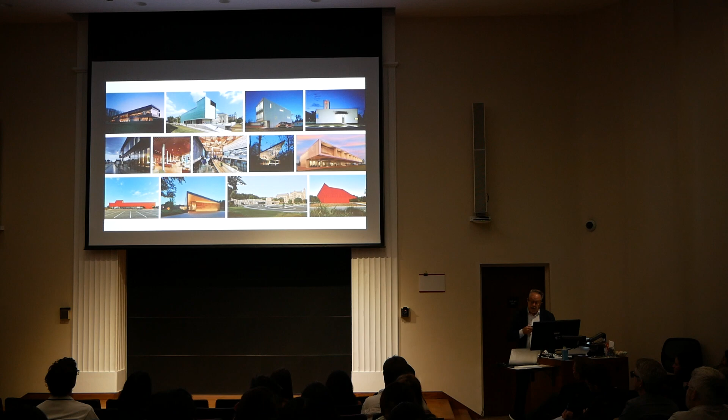So we're a firm of 25 based in Fayetteville, Arkansas, as was said. For the last 30 years, we've been working on a variety of types and scales of buildings, everything from carports to schools, churches, healthcare, and all types of buildings, all types of scales and budgets - even now international work with the State Department, where we have a new American embassy from the ground up in the poorest country in the world, the Central African Republic, which will hopefully start construction next year.

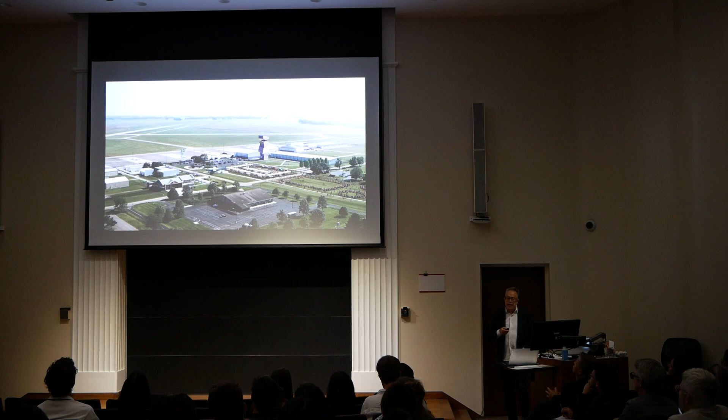Just a range of projects, but really coming at it with a very similar ethos. What we like to think about is that wherever we work, place is the canvas, architecture is the medium, and it's shaped by the forces of nature and public life, and is particular to local form. We like to say we make work in the place, of the place, for the place, and sometimes necessarily out of the place in order to make that work.

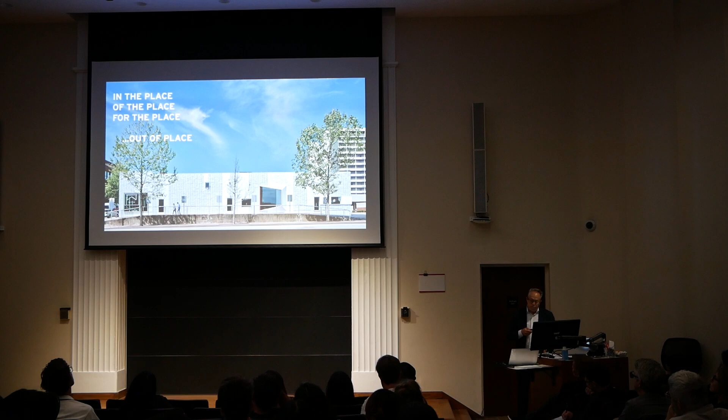I know it's kind of crazy, even 5 years ago, but we took every window opening that was there. We decided to do an essay on windows we love, always thinking about elements and spatial propositions as a way to develop a character without having to develop a very novel narrative.

But nonetheless, we always think of this as the existential moment when you walk into the office. You have to be prepared to take on the bear, these challenges that are much greater than you, but you have to take it on with a great sense of purpose.

For us, place is really defined as a tangible representation of that intangible society that lives within, and I like to call this placeness. Thinking about placeness, and wanting to make an architecture of places, it's really necessary for us to embrace everything about a place, even the bad things, even the tortured histories of places, and to get below the surface to the underbelly and incorporate them in who we are and how we design, and what an architecture of the place, in the place, for the place can be.

So often this is a story of transformation, taking the world as it's given to us and representing it on our terms. We're always inspired in many ways by the patterns that connect, the patterns between what's nature-made and what's culture, as a source of inspiration in the work, looking and operating at high culture and low, and the in-between.

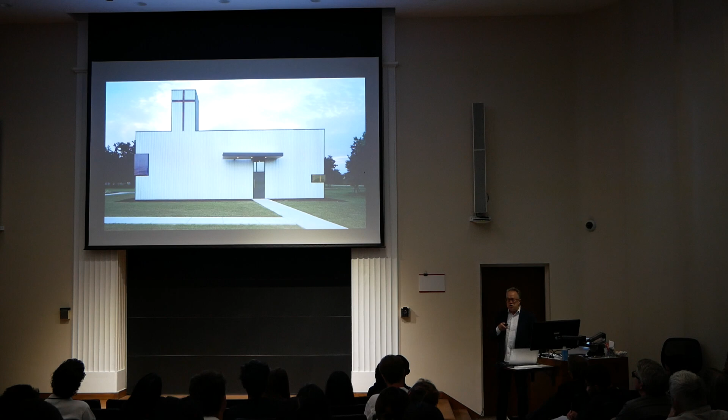What we do is customize all the transition details so that we get a great deal of seamlessness, let's say, in detail. And how would we do this? Well, we took the existing shed, left it as is, wrapped it in a new skin, a new substructure. We added 10 feet to the front of it to create a narthex, by which you can move north-south to get on the east-west axis into the sanctuary for about 100 people.

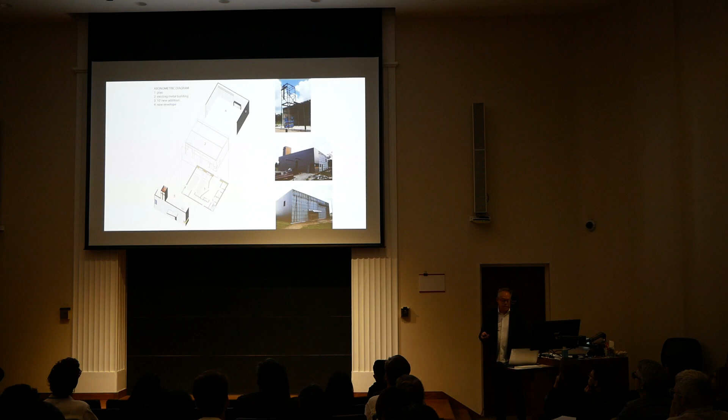The walls open up to allow for an oversight and a fellowship hall. They're very simple. I call it the true American double skin envelope. And here it is here. And so those transition details really allow for things to seamlessly shift around.

And then with a fidelity to craft, what we try to do with every project, no matter how modest, is think about the presence of the worker and the hand and how that can be elevated in some ways. So we coursed every element to the ribs that we had, in a very carefully precise dimension. Everything is neatly fitted in with the windows, the canopies, and at the door you see the concrete pad, that's actually the fire doors, neatly as part of the site. So all of that to get to the level of abstraction we wanted.

But they really wanted a dome, and we had told them before we could not put a dome on the church because of the pre-engineered structure. So they allowed us to put it in the plenum, but they couldn't afford the dome that we had spec'd for them - they just didn't have the money. And our contractor was saying, I don't know if I can build one that would be acceptable to your level of craft. So what do we do?

He goes, well, I have friends. And so he came back a few days later and said, I got this friend of mine, he's a retired metal worker, lives out in the mountains about 40 miles away, and he loves beer. For two cases of beer, he'll make us a satellite dish this year. So we were in the middle of construction, so we trucked it out, skin coated it in plaster, jacked it up on a scissor lift, and we have our dome. So that's how we rolled it up.

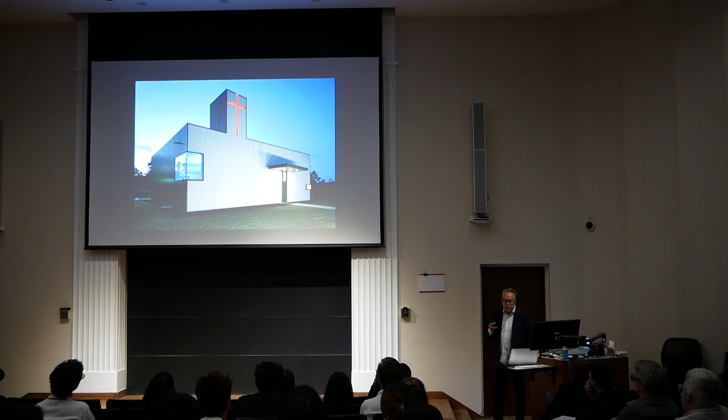In 2013, we were notified by the AIA Institute Honor Awards that this little project had won an Institute Honor Award. They said they were so impressed with the budget that they did research into the history of the awards program and discovered this is the least expensive building to ever win one. We were thrilled, because it underscored what Ati and I and our whole talented team have been trying to do for the last 30 years: demonstrate that architecture can happen anywhere, at any scale, at any budget, for anyone. It's not reserved for the few, it should be accessible by everyone, and that's the approach we take.

So in that spirit, this idea of transformation of a building, we can also think about transformation of a landscape. We had that opportunity at Shelby Farms Park in Memphis, Tennessee. This is a 4,500-acre urban park, the largest in the country, and we worked on it with Field Operations, James Corner and his team.

They were already working on it for a few years. We were brought in to look at the heart of the park and how to generate a new identity for it, with greater access for all the constituents of Memphis. It did not reflect the socioeconomic and racial diversity of Memphis, and we wanted to get it profitable, in the black, because it was constantly just barely surviving.

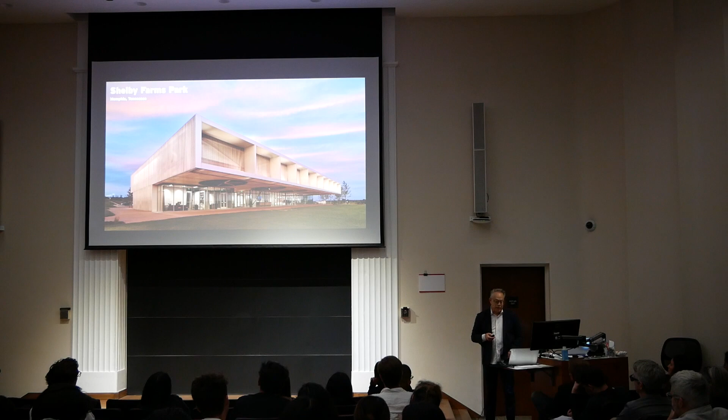Part of the park is this 200-acre area where they expanded a lake, and we were asked to generate 7 or 8 new programs, new structures, an ensemble of figures that would activate the park and the spaces between them. I think Corner's team planted over 1 million trees in the park itself. Really exciting collaboration.

The other side of Memphis in this park area was a prison farm, where prisoners actually farmed the land. They had blue ribbon cattle, and that's basically how they fed themselves, or whatever was left over was sold back to the county. In the 70s, when this was no longer considered an acceptable form of rehabilitation, it was turned back over to the county, and it was well beyond their capacity to manage. Developers wanted to group together to turn it into suburban housing development, but the citizens stood up and said no, this is a great natural habitat, we want a park. So they formed a 501(c), and that's how Shelby Farms came about.

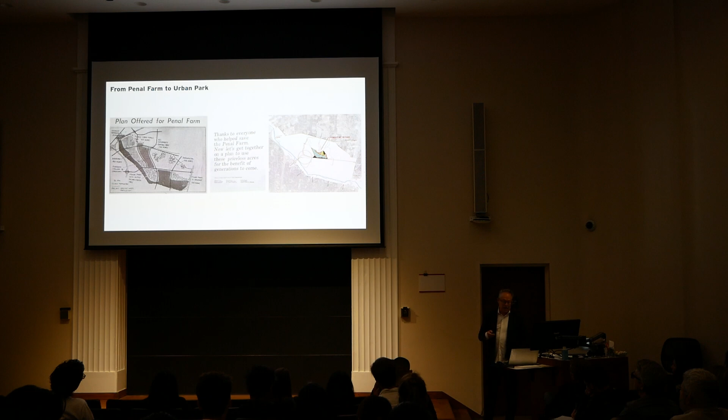You begin to see that we worked along the edge, while JCFO also developed more programmed activities along the lake. One thing we noticed when out on the site is that wherever there was shade, there was people. No shade, no people. Pretty common sense.

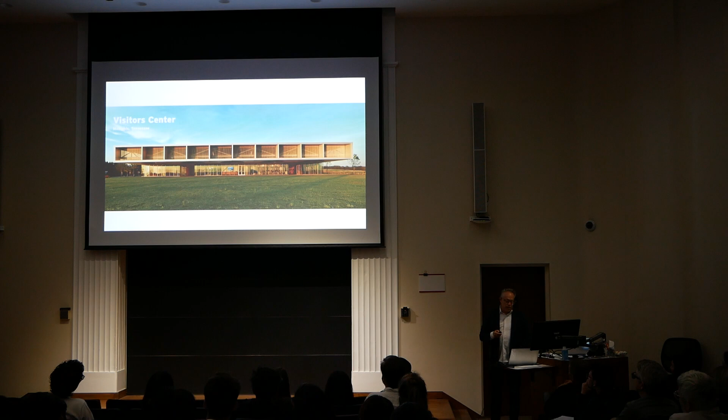But we realized we were in the middle of old pastures for these projects, and that the landscape was going to take a while to come in. So every building had to create its own shade. We thought about going back to roots, back to origins, the vernacular ways breezes were created through dog trots, breezeways, porches—this is well before air conditioning. So our first building is an 8,000 square foot visitor center with an 8,000 square foot porch, oriented toward the south, made out of a very simple palette of materials.

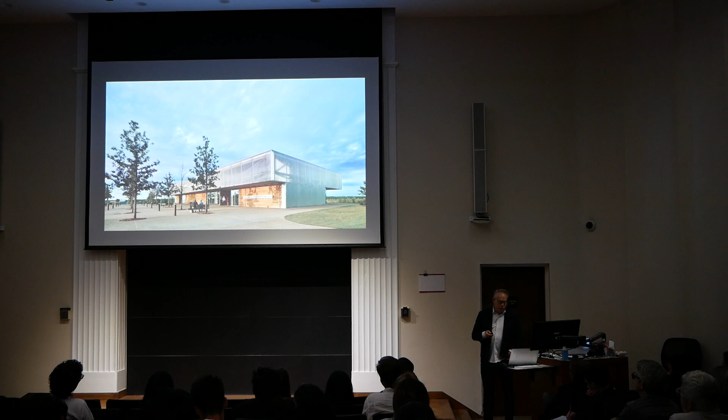We took local bar grate, aluminum bar grate, and turned that into a cladding system to create a diaphanous skin with local third growth cypress planks, and metal panels where we could use them. These extended breezeways that cut through provide a cooling effect, but they also set up these beautiful extended thresholds into the landscape, these uninterrupted views.

The shade from the 32-foot cantilever basically shades this part of the building year-round, so they can program it to create other revenue streams like yoga, receptions, other things going on out there. And to cool it—if you're in Memphis and you're in the shade, that doesn't mean you're cool, it just means you're out of the sun—you have to ventilate. So we did that with Big Ass Fans that keep air moving through.

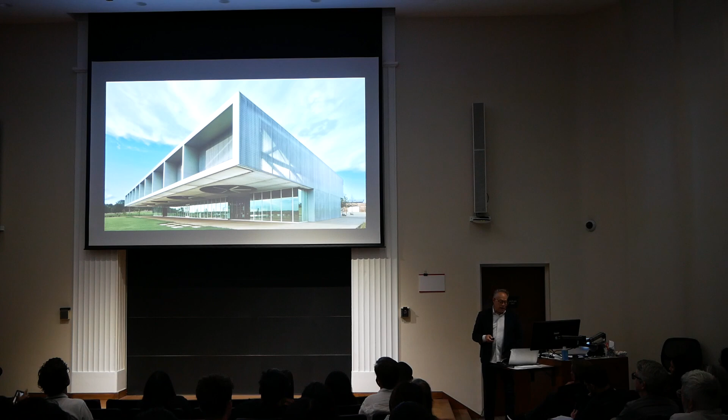Here you can see the diaphanous skin, the way light moves through it. It really changes color throughout the day because it's taking the temperature of light, capturing that and representing it to us. Beautiful configuration of the land by Corner really fixes every building to the site.

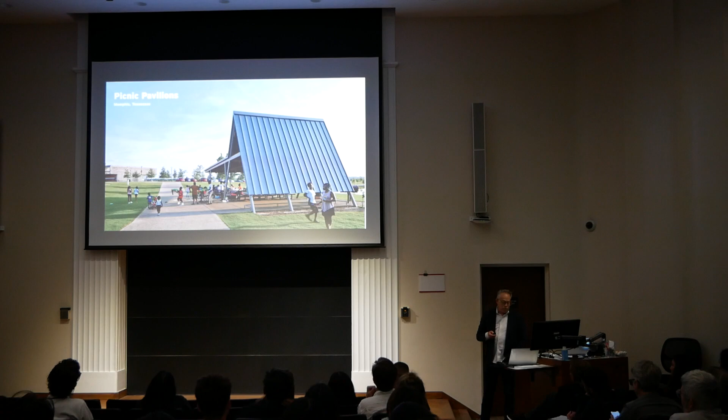We have a collection of these buildings, the picnic pavilions we like to call the crickets. These are booked out for months. They're great shade pavilions, but they're also great places for family reunions, and it's really become quite popular with the citizens this year.

And then the boathouse with its canoes, paddle boards, kayaks and so forth, its own porch there and some concession stand. Again, using the same palette of materials, as reductive as we can make it—we try never to use more than two, maximum three materials for any project.

The stage pavilion serves the event lawn, and on the other side are events that happen on the lake, so it kind of does both. And when it's not being used, it makes a really great shade pavilion and gathering spot in the park.

And then finally, the restaurant event center—a 500-seat conference area, along with a large restaurant with a very large porch. We initially worked with Kimbal Musk, Elon Musk's brother, who you never hear of, but he has this farm-to-table restaurant called The Kitchen out of Boulder, Colorado. This was their first standalone restaurant here.

It really has a beautiful interface with the lake, with this extensive porch, 80 feet deep. Most of the people sit outside and have these great sunset views of the lake beyond.

And what's happened since it opened in '16—one, attendance has more than doubled. The racial diversity and socioeconomic diversity has increased by over 7%. And it's been profitable ever since it opened too. So it demonstrates how we can strengthen institutions, and these transformations can happen at scale.

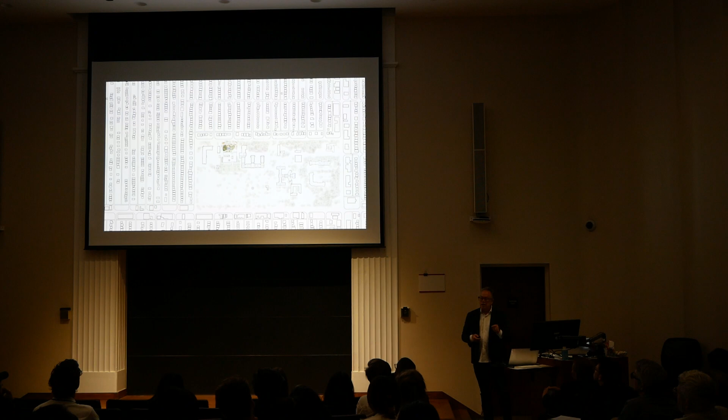This is the context it sits in the campus. You see all the single-family homes here. It's a very kind of vital place. There's lots of emptiness as well, but the way to bring this back is through education. One thing about Detroit, if you know anything about it, all the hipsters are moving there, and they're all moving out as soon as they start having kids because of the education system. So we've got to figure out how to fix this. This is the first step in that direction.

So we were asked to not do the community engagement. It really had to be done by folks who had the trust of the community, who've been there a long time. So that was Dan Pitera, lead of Detroit Mercy, who has a group that has a lot of trust with the community. So they did that.

And of course, they kept coming back with the aspirations. The community wanted a new identity, a community center, a sense really of ownership of this particular piece. And one of the things they sort of insisted on was that they did not want a monochromatic building. They wanted polychrome, which Wendy Jackson, the managing director of Kresge, also seconded. And so she and I got into a conversation about this, like, well, how do we do that? It's terrifying for an architect to take polychrome from the inside and put it on the outside.

Well, in our talking, we started talking about the Great Migration, we started talking about Southern culture, and we came on this common experience that we had both been to Gee's Bend, the quilt ladies at Gee's Bend in Alabama, which we're originally from. And so I'd been there several times, and so we began to think of this as a coat of many colors, a kind of quilt, the same way in which these ladies take discarded rags and cloth and stitch it together into these beautiful, useful works of art. We thought, maybe we could kind of stitch this all back together.

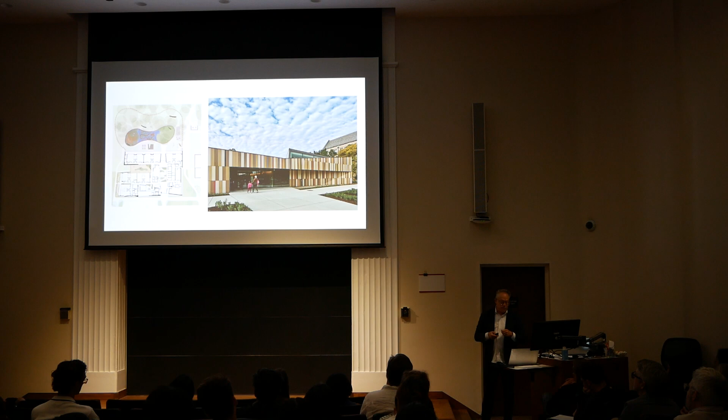And then we looked at ways to grab light from the side, from above, from the front, help articulate, again, this idea that elements—doors, windows, columns, and such—can be spatial propositions. And so just a very gentle kind of welcoming of that wall that sort of inclines or inflects into the building here and welcomes people in, families. And of course, the front of the first courtyard here, the lobby on the left is a coffee shop for families, and on the right, community spaces that can be used even after hours.

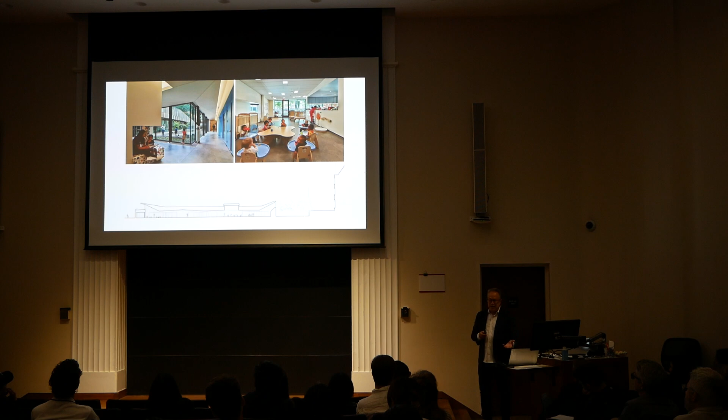And then again, these are controlled places for play, but great places for light. Every space in this building is a learning or educational space. The circulation space is never truly circulation—it's always used for learning in some form. All the classrooms are oriented adjacent to the outside or to a courtyard. And we're using a kind of sectional device we call pitch and roll that begins to create the plenum for mechanical up above, but creates a sectional difference in every room in the space itself. Again, to move beyond some false notions of democratic space, which everybody gets the same thing, into ideas around choice and similarity and variety. And just finding ways, like carving away in the hallway, to make this nice reading nook.

Every classroom has direct access to the outside. If you're having a lesson, you can go out and make an analogy to something outside. It's really great, that kind of thing.

And then there are different types of places where they can take their lunch, have a lesson, play—very multi-purpose. And in the community spaces, all lit from above, there's lots of activity that can happen.

As a way to bring families together and to strengthen the community organizations, the courtyards spill out into this grove of trees to the south. This is a landscape done by Margie Ruddick, who did an excellent job weaving together an education and learning playscape that's really quite active. And in the evening, everything lights up and acts as a type of lantern or beacon.

One of the nice things—I'll go back real quickly to this—is this is also the access for families in the neighborhood who want to walk to drop off their children. So it has this sort of double front, but it makes it part of the neighborhood that surrounds the campus.

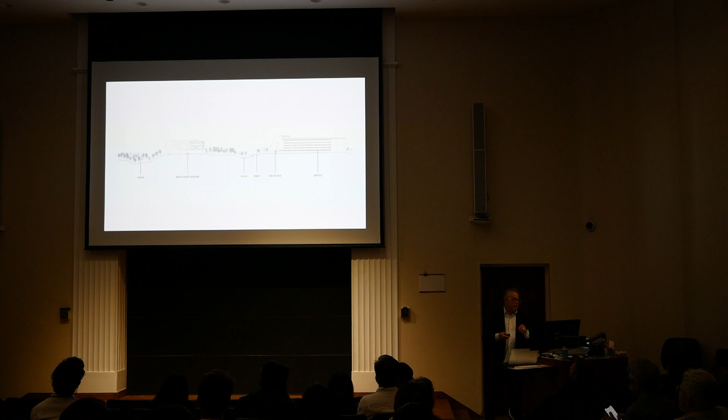The section here shows these ravines and valleys where these things interface—just to kind of understand formally what we're trying to do.

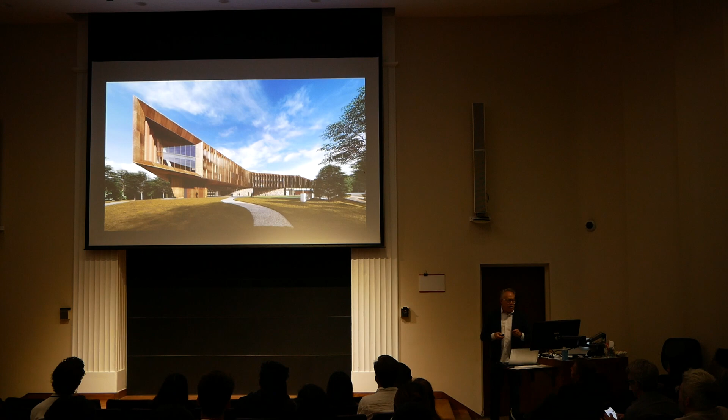We're always looking for shade for porches—sometimes they're designed, but they're also provided. How these are programmed shows there are big plans already with a community porch up at the top as well.

You can see how it brings that bent lawn under construction here. This should be done—the contractors keep at it.

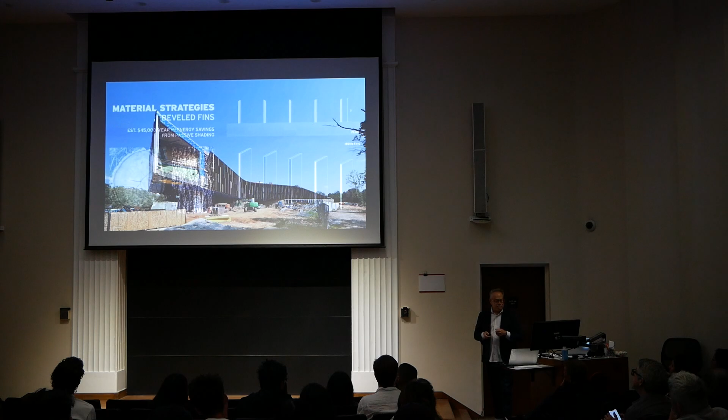The material strategies are very simple. Like I was saying, we're beveling the fins. We're really looking at striated bark on local white oak as a way of thinking about how bark around a tree captures sun and shadow over the course of the day, making that happen the same way. Full-scale, one-to-one mock-ups really test the ideas and make sure we get the details right before we start.

This is a museum-level quality building, so we're considering this our first one. You can see it now going up, around the sun's lighting and such.

Just a sense of how those portals and shade porch areas work—it really becomes a threshold. We're playing with ideas of counter space, shadow, and light.

We're always making light a feature here, even in the stone. We're using what we call rope joints—joints that sit around, strong enough to hold the stone in place, and they create great shadow play as well.

Everything has to flow, so we have a lot of rounded edges and so forth.

The interior has the same idea of the forest and the cave, with the stone floors. This is all local milled pecan to develop this beautiful canopy that happens on every floor.

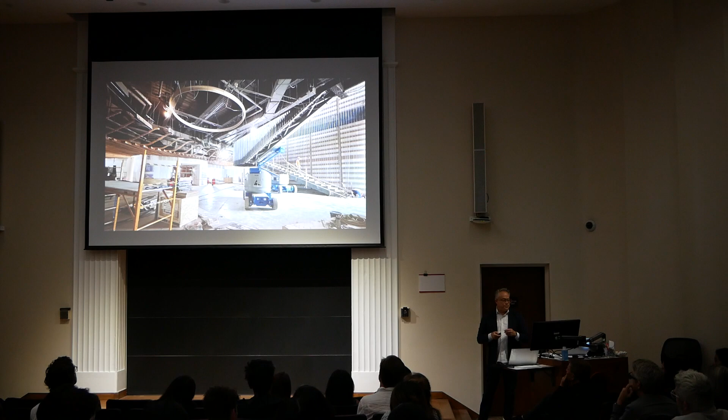You can see that now under construction as well, the grand stair. Upstairs is a lot of office space—an open office area with a series of bigger conference rooms.

Consultation rooms articulate this big open space that's really lit from the east and west side, so there's a lot of daylight and very little artificial light. There are meditation spaces—this is one 30-foot cone.

We wanted to capture the light from the north, but we didn't want you to see the source of the light, so we took the cone and bent it to the north. This sort of anti-space—you come in to decompress.

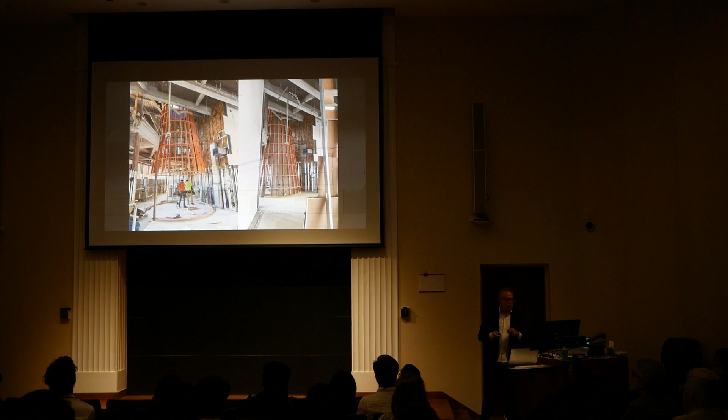You can see in the section how it begins to fold over. Then we were trying to figure out how to build it—they actually built it from the top down, which I thought was interesting.

We heard about means and methods—we had no idea this would be more of it, but they figured it out. That's why they're builders.

This is all coming together. This will all be coated in Venetian plaster white—it has a really beautiful, spiritual effect.

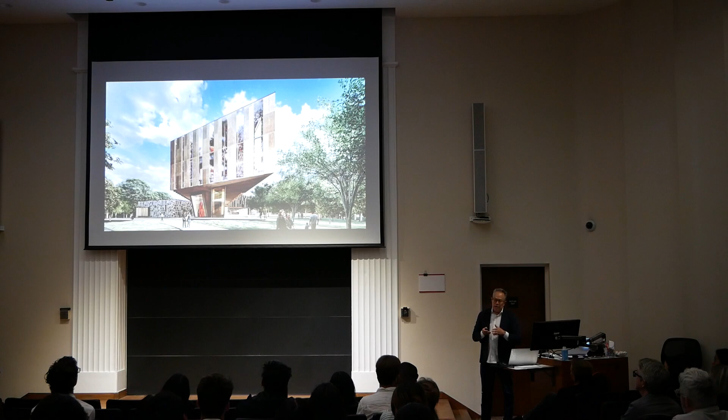So ultimately, what this becomes about is an intersection between art, nature, architecture, and health. These things can all intersect to create a better sense of well-being, a better sense of how we manage life, rather than just how we manage things. I think it's got a great mission to it.

This interfaces with a plaza and a playscape that goes down into the ravine. And then what if you had a bar? And then what if you had retail? Just asking these questions, and so let's try that.

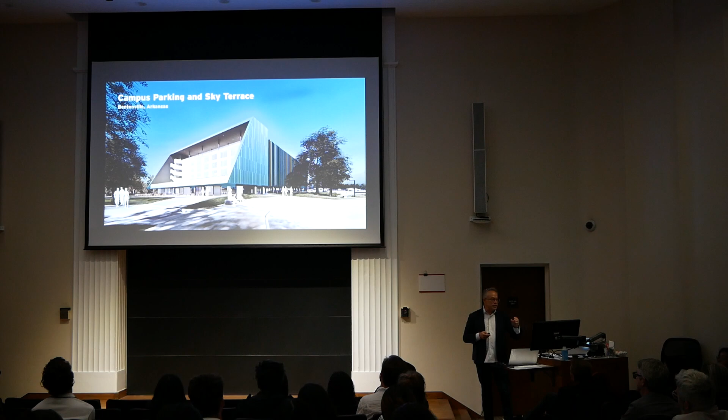So we developed this big 150-foot wide by 4-story proscenium for art, for display of art, performances. And then underneath the big porch, inserted bar and retail, facing onto the plaza. And you can see how it starts to work here. And they built it, which is amazing.

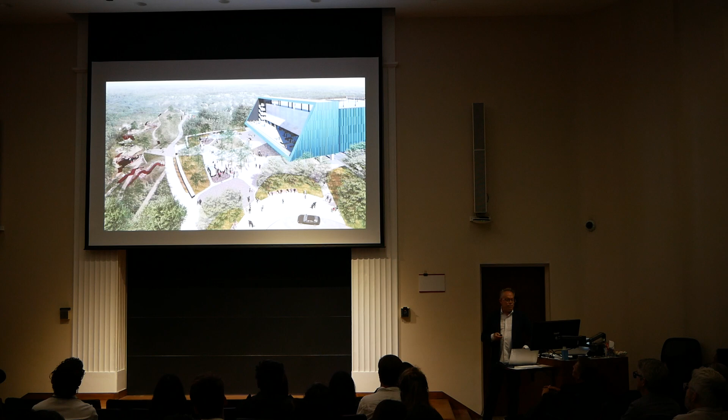So this is currently this parking lot, but we call it Art Park. People come out of the garage and go down the stairs onto this great porch, underneath into the bar. You can see below, and then there's the water play area. It's filled with kids and families all day long.

So another part of the access into the park. And this is that professionally shot with the bar, which really opens up all the sides and becomes part of the porch here.

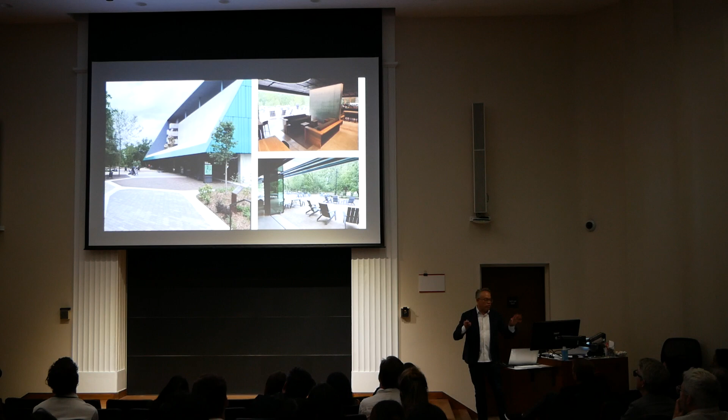Now, one of the things we've been experimenting a lot with is how to create specificity in the surface in an economic way. So we use a lot of metal, and I remember Fay Jones would always use particular automotive body paint on his metal. I think it was like a 70 Chrysler or something. It's a Chrysler. Why do you use that?

And here you kind of get a sense now of how that all comes together as a building. And then we programmed it at night to do its own sort of things through light and through performance. You always think about how the buildings have light after the sun sets.

So we're doing our first tall building in Boston. Well, actually Allston, right across the river, right across from the Harvard Business School. This is a joint venture between Tishman Speyer developers and Harvard, called the Enterprise Research Campus. It's in an old industrial railway parkway area, and they brought together 4 architects to make this new campus.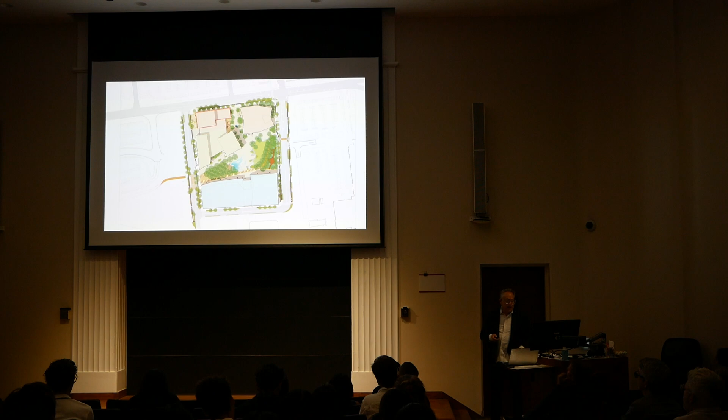So you begin to see the Charles River and the proximity, right across Western Ave from the business school, and how that greenway moves through and connects to the river. Our project is right up on Western Ave, and the master planning had already been done when we got it. What we were given was this master plan — massive, like a table, a block, and a tower.

And we started to think, what if we could establish true frontality by combining the two into a single figure? We saw that the campus existing master plan is like a still life — really massive. We wanted to make a portrait in the midst of a still life. So this visage of a building, and then activate the ground floor through local retail programming.

It's a 265 room hotel. We're doing the core and shell primarily of that, and they wanted to shape it to the skyline and context. So a series of porches that reach out to Allston and to the laneway, into the greenway, and then one big snout from the thing towards the Boston skyline.

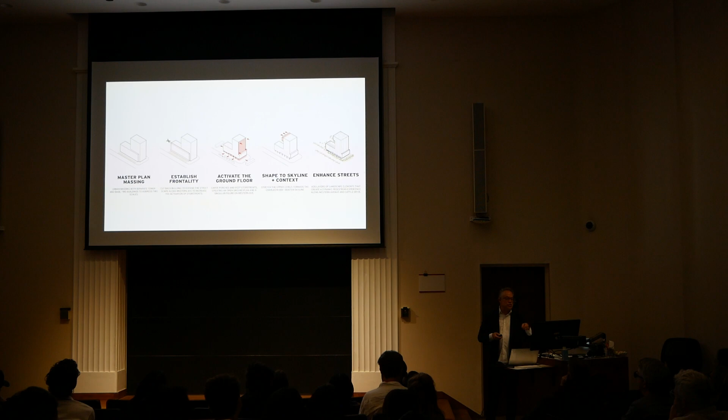There's a bar there, and then we enhance the streets around it with this great landscape. So here you go — it sets up the views for that. These are all actual views.

And then you get to kind of see the figure and how it meets the ground and how it meets the sky in a very purposeful and particular way, and scale to folks at the ground level, and really scale to the city up above.

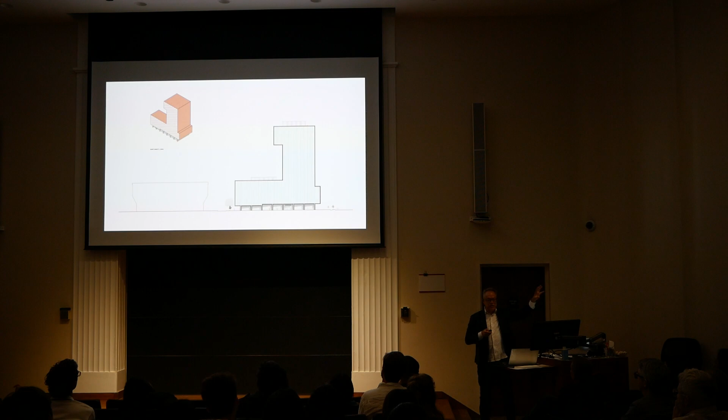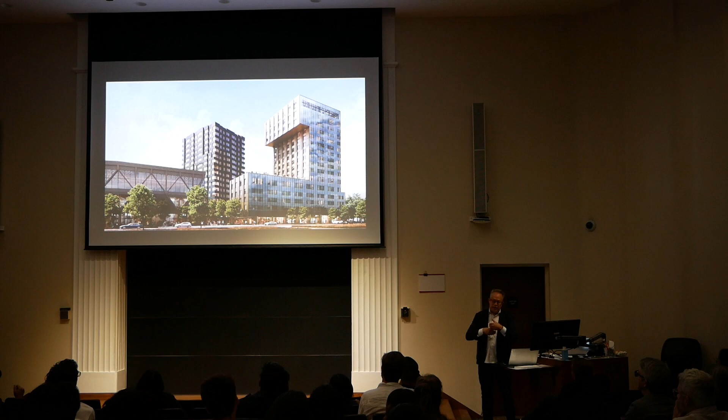One of the things we've done is we wrapped it on 3 sides with this very beautiful scallop metal. The north side is all glass, really exposing the life of the building, the hotel, right up to the street here.

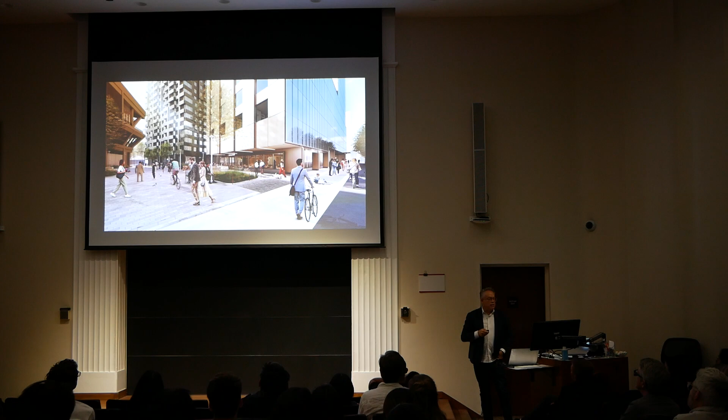And then these porches, they begin to scale, they begin to provide places to hang out, places to eat. Again, we're using all local retail. Entrance into the hotel along the street. Another porch in the back of Allston.

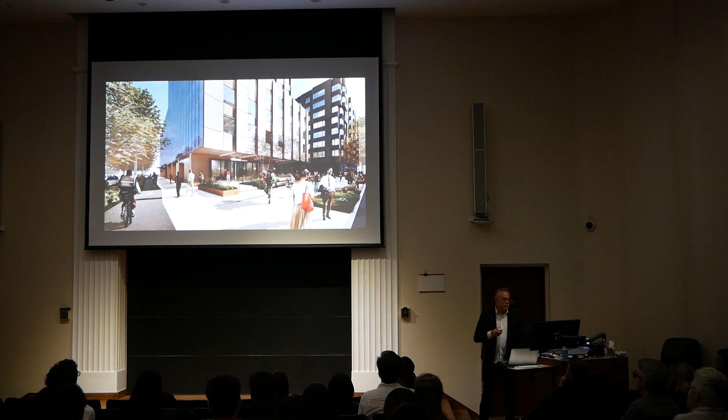The housing by MVRDV has 25% affordable housing, which is the largest ratio in Boston, in the state. So that's a great aspect of this too, getting more of Allston there.

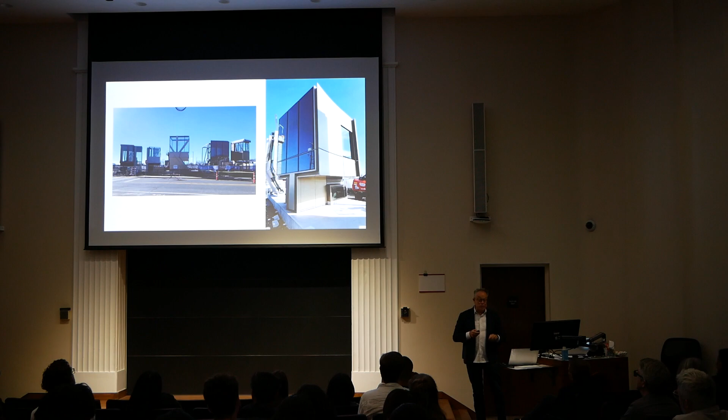We all had to do a mock-up, so it's all about getting the material palette to work. This is our sort of scallop flat. We wanted our automotive body paint, the metal flake and all that. We were all excited, we picked this beautiful champagne luster. And then they hired a fabricator in Europe, which doesn't allow that - they only do powder coat, which I'm not too happy with. But nonetheless, it's quite nice.

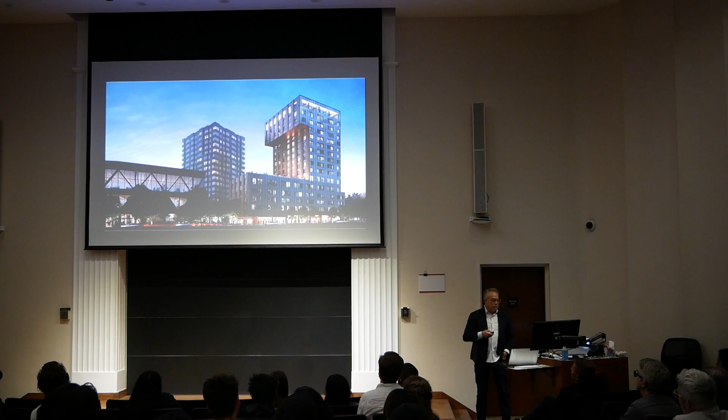So this is it in rendering. And at night it sort of comes alive through the sheerness of the facade, which is all kind of inverted mullions. And a little bit of construction, currently under construction here. So they're moving quickly, pretty exciting.

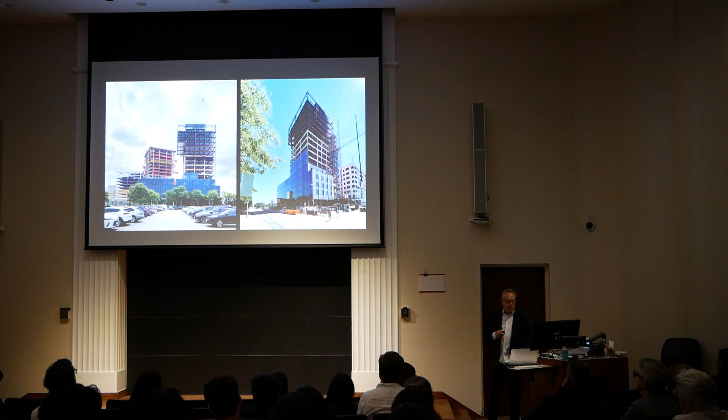So one of the things that has defined us as a firm is being able to try to look for opportunities to enrich the everyday, and enrich the experience of the everyday through sometimes the most prosaic materials or systems.

So when I was working in Detroit, I was asked by a developer there, Phil Kafka, to consider doing a mixed-use development in Fort Worth, Texas. We were quite excited about it. He had been known for years, and he wanted to take a simple system of the Quonset hut and see if we could bring it into an urban condition as mixed use. He had only done it for pockets of housing in downtown Detroit.

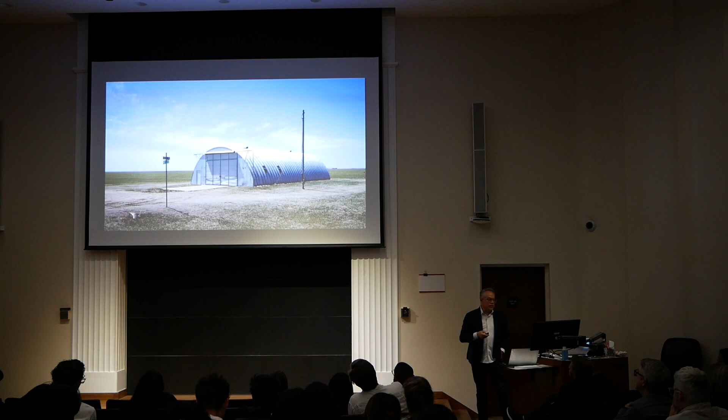Typically, this is how you find a hut. But we're now asked to do 8 units with offices, a restaurant, grab-and-go vegan ice cream, which is kind of cool, so tasty, and a small bookstore gallery. And so this would come up.

This is in an emerging neighborhood, Magnolia in Fort Worth. It was an opportunity to really think about how we address the street, and rather than develop this all 3 stories to the plot lines, Philip's idea is to always be generous, to give something back to the community, public space, mixing public and private. So we have 1 story, commercial restaurant along the street edge, and in the backdrop is the housing and offices.

And of course, there's this building not far away that we were really drawn to, like, here's an idea we can work on, a way to ennoble the prosaic. But as we got into our research, we discovered that Mr. Kahn had already tapped into that - where he was getting his ideas from was actually from the stockyards there, these buildings here. So anyway, it was nice to tap into that vein of thinking.

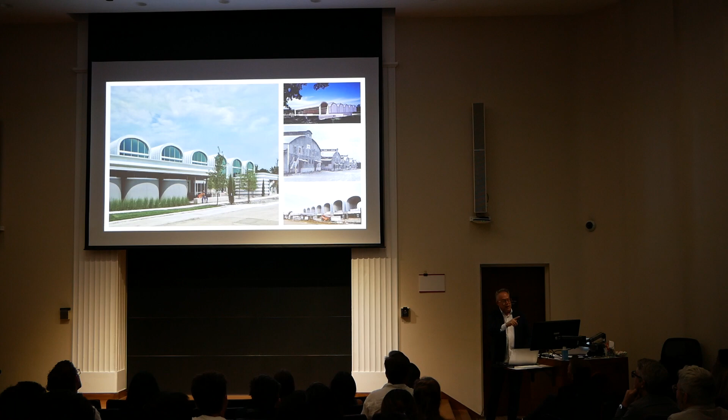But we're really developing the street edge in these ways. These are put up in about a day and a half once you get the base done. It's all prefabricated in Canada.

The big trick we had to play here - this is structure for us, the vertical 3-story vaults. But we wanted a consistent language, so we had the idea of flipping the Quonset on its side and turning it into cladding, the same big corrugation for the 1-story buildings. That's how we set this up to get the consistent vocabulary.

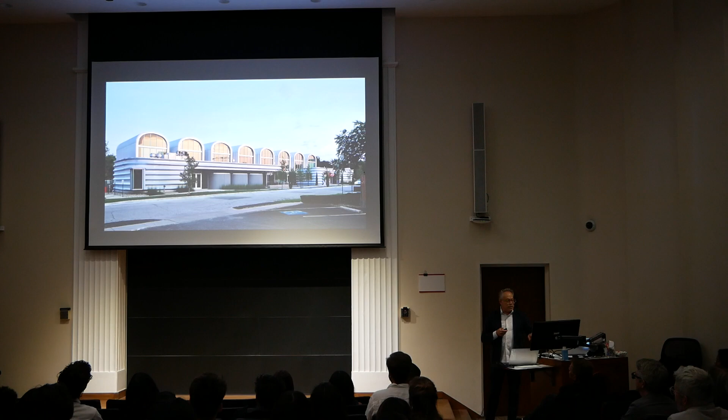But then it gave us opportunities to make windows and doors and openings and create our own custom detailing for that, like this window in the corner that extends out to the street. It's actually the kitchen, so you walk by and can see the chef and sous chef working inside. You have to make that connection between what's being prepared and what's actually being presented.

This is a public plaza by Julie Bargmann, DIRT. It's all recycled, repurposed stone with 2 types of trees.

I'm not sure. The tree was already there. I'm not sure when.

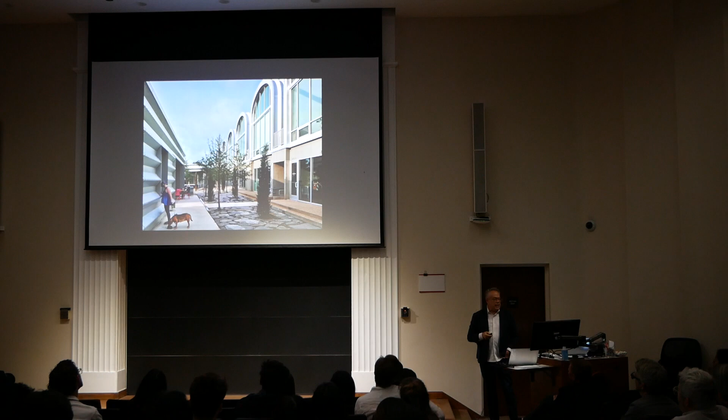Inside, very simple vault. You have a service area, bedroom, bathrooms, mechanical, kitchen, all out just multiplied. The interstitial spaces between are also very activated for the public. It's really become absorbed and welcomed by the community, and now small businesses and offices are being inserted, like this barber shop. So it really has found a way to connect at the scale of this neighborhood rather than one size fits all. Very excited about this, it's been a huge success so far. Maybe a little ahead of its time for this place, but I think it would be good to see what it begins to generate for the future of the community.

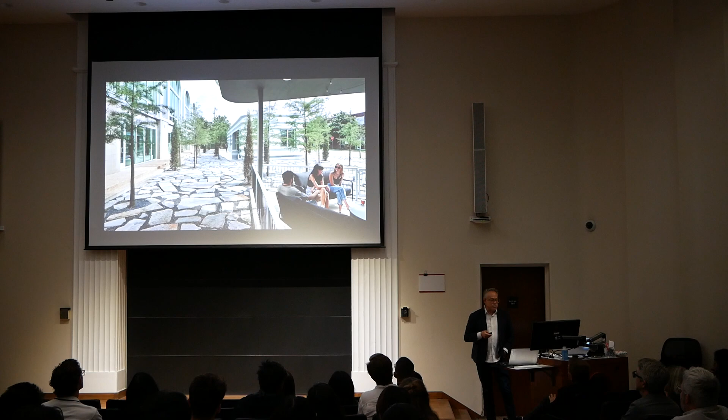And our rear window moment, we got everybody to raise their shades. It's pretty rare that happened to get this one great shot.

Tim Bursley is a master of persuasion.

So another project I'm just about done. Sorry we got such a late start. Well, I'm trying to think about how to introduce this a little bit. In Bentonville, Arkansas, I don't know if you'll know this, but...

There was real development of the culture of that place around biking and mobility. It is now the number 1 mountain bike destination in the country. We had an opportunity to do a co-working office for Runway, working with their team, headed by Michel Rojkind, architect from Mexico, and his team, Christian Callahan, Rucci, James Slade, a host of folks. It was a kind of design collaboration between our team and their team.

The idea was to allow the building to be shaped by this notion of mobility, bikeability, walking, and manifest the culture through the building itself. So it's billed as the first bikeable building in the U.S. It's a 200,000 square foot building, about 5 blocks from the town square in Bentonville, a town of only about 50,000 people. So you get to see it.

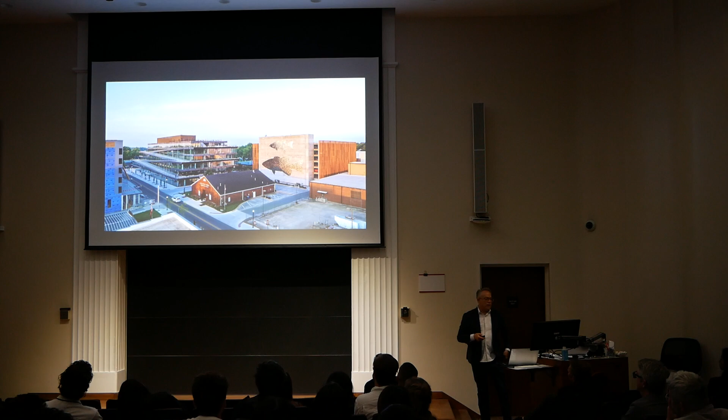Really thinking about how you take public space and allow it to elevate. It creates a series of terraces for the public, and this intersection between the public and the private creates a sort of ambiguity, a real sense of community. And then a parking garage here for public art. It's all clad in these warm copper panels, glass here. And everything's on a 1 to 19... no, there was a 1 to 21 grade.

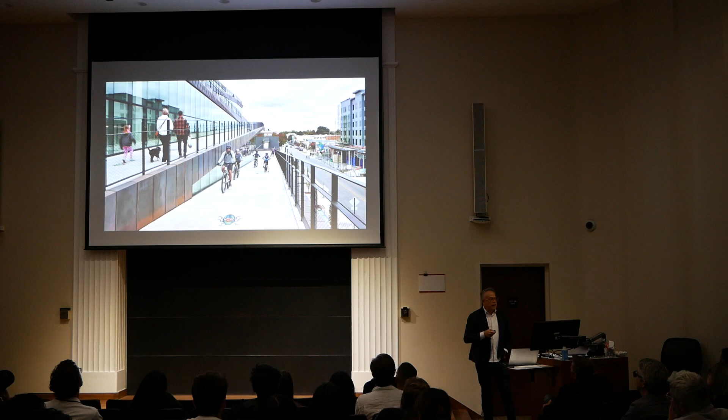So you control the grades and demands here, but you can walk or bike up, and again there's a series of pauses with terraces, all the way to the top floor, the 6th floor, with beautiful views over the town. And then working with Stefan Sagmeister on big public art for it as well.

It really tries to create another type of value proposition in the community, and it's incredibly used. We didn't know if people would really want to get bikes, but it has become an extension of the Greenway. They now have First Fridays, and it's amazing how many people can populate this building.

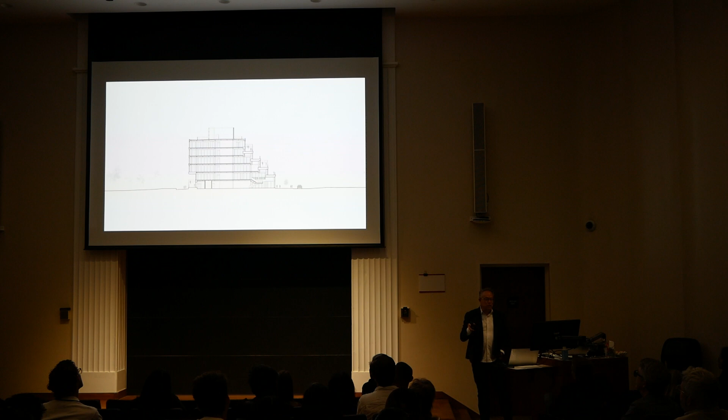The cool thing about it was we were worried about the massing, 6 stories in a small town, so the ramps help set up the way to step it back. So when you're actually on the ground floor, it really feels like a 1-story or 2-story building that you breezeway into the city park on the other side.

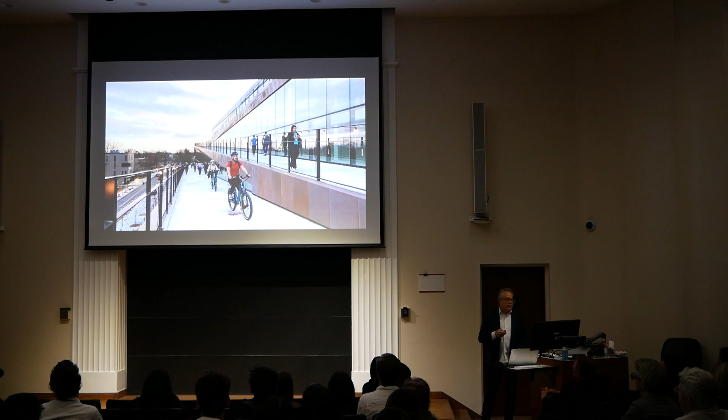This nice interface between exterior and interior, this sort of activity, the idea of a very collegial work environment, a variety of different types of spaces and event spaces, office spaces, that really populate the building itself. It's pretty cool just to be sitting there working and see people glide by above you. Quite interesting, but as I've already foregrounded, it's been a big hit.

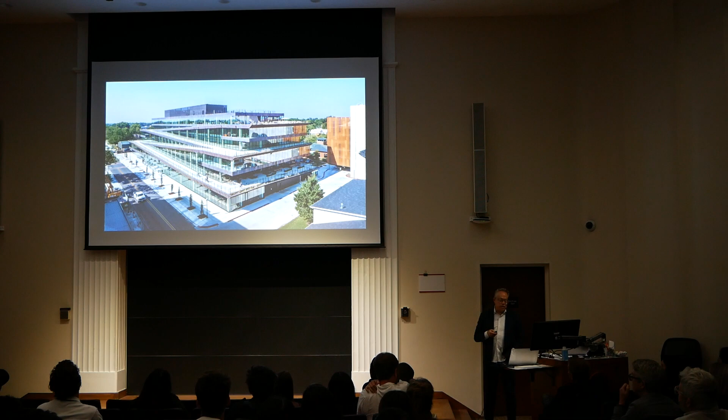It really demonstrates another idea about public space and how it can be used to articulate the building itself. The last project I'm going to share with you is a school. We really committed to doing schools wherever we can, one of the most impoverished building types in the country. This is a maker school in Bentonville, 8 blocks off the town square.

The person you see here is Louise Thaden. I'm sure you've heard of Amelia Earhart. Well, Louise was a contemporary of Amelia Earhart. She grew up in Bentonville and was a pioneer in aviation. She learned to fly planes as a barnstormer in Bentonville, then eventually moved to California, then to Kitty Hawk. She set two records for the Bendix cross-country air race, beating both men and women. She and Amelia Earhart were asked not to enter—they weren't really qualified, so to speak, anyway. But she did it anyway, with this pioneering spirit.

That's what we used for this maker school called the Thaden School. It has 3 signature programs where you learn by doing and making, called Wheels, Reels, and Meals. Every student gets a bike and learns to work on bikes, fabricate and fix them. They learn how to tell stories using animation and film—Reels—and then learn how to produce food, grow it, prepare it, and go to teaching kitchens. All of these create a curriculum that connects the three.

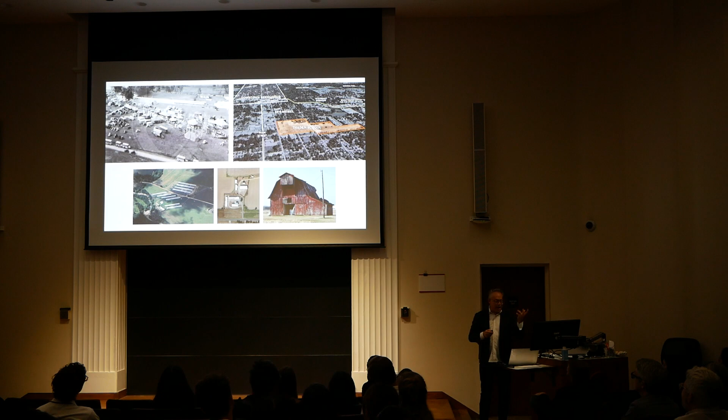We're on a 30-acre site that used to be the old fairgrounds, and at the turn of last century, the high school where Louise Thaden actually attended. So rather than looking at a quad city type layout, we looked at farmhouses, farm groupings, and barns as a way to master plan this, thinking commonsensically about how you lay out buildings relative to the sun and movement.

We layered the design through the landscape, circulation, water management, programming, and community geothermal systems. All of this becomes a didactic landscape that students can learn from. And there are no canopies, no fences around the school.

It's index tuition, meaning anybody that wants to go can go. Your tuition is based on what your family makes. I know one student whose family had a food truck, and she paid $500 a year. She's now at Westlake—their graduation rate into college is 100%. So everybody attends, and some people are paying $25,000.

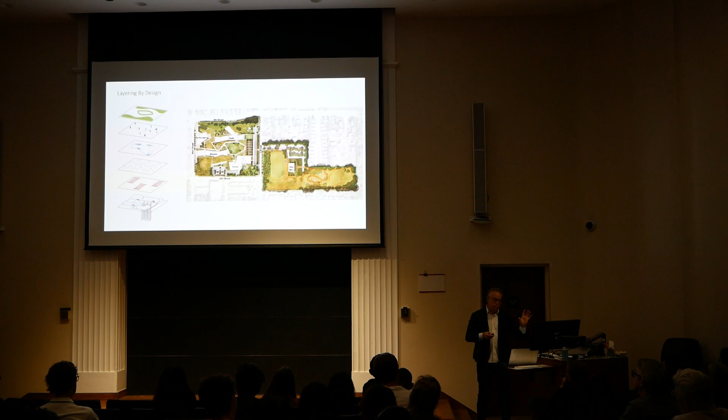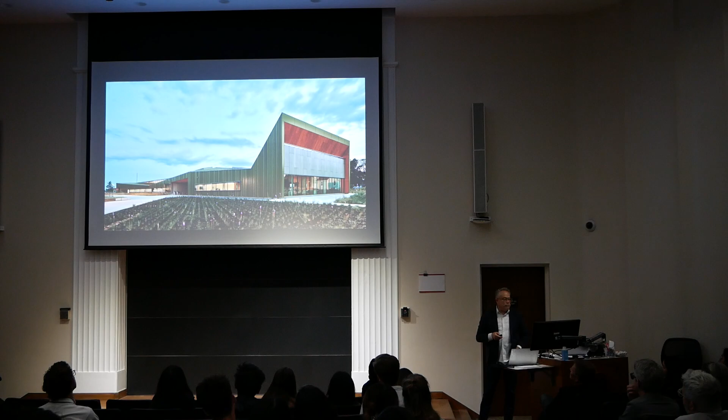Very quickly, the Reels building—we're again using pitch and roll to get daylight into the middle of the building, but also to create variety through different configurations of the spaces. This folding pops up at the end. This is also where film and animation is done, and it's actually used by the community—it's a silver lawn, used for projecting films, and it's part of the film festival every year. That's a big thing.

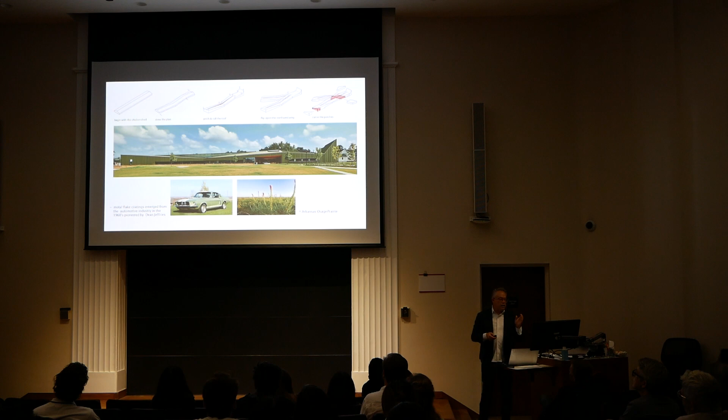Back to the car colors—in this case, the '67 Shelby GT Cobra, combined with Osage prairie grasses. We made our own custom color working with Sherwin-Williams, and it's really great how it works at the beginning and changes quite a bit in the light.

Every one of these linear buildings is cored out to create a cross axis through the site, through the campus. These are also thresholds, breezeways, and outdoor classrooms that students use. We skylight these, and they're really places of transition, but also places to linger in—the best place to linger being the hallways of the social space. You don't see any lights in this; it's all daylit, and we use kind of an uplight.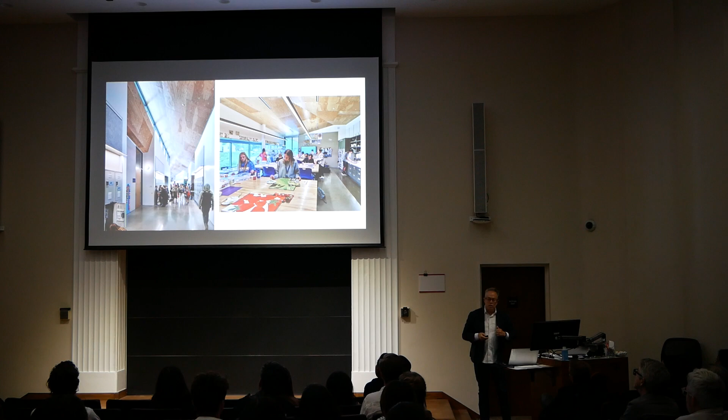So it's just regular old plywood—they wanted white oak, we didn't have the money for that, so we used regular plywood without window stamps, just a boxwood metal system here. This folding allows us to change the shape and create articulation for sound and light. The Wheels building, its companion building, has a really great bike shop, fabrication shops, wood shop, robotics, and it brings a great porch onto the main street.

Landscapes to the south, and then the inside, the same similar idea of folding, pitching and rolling of the roof. This data organizes everything.

The bike shop here has a program of community engagement on weekends with fixed bikes for folks in the community. Pull it out underneath this porch here. The building you see beyond is a performance building, so what ties a lot of this together is music, drama, theater.

This was designed actually while I was at the academy. A little bit of Rome got in there, a 300-foot long loggia, the first one in Northwest Arkansas, or in Arkansas.

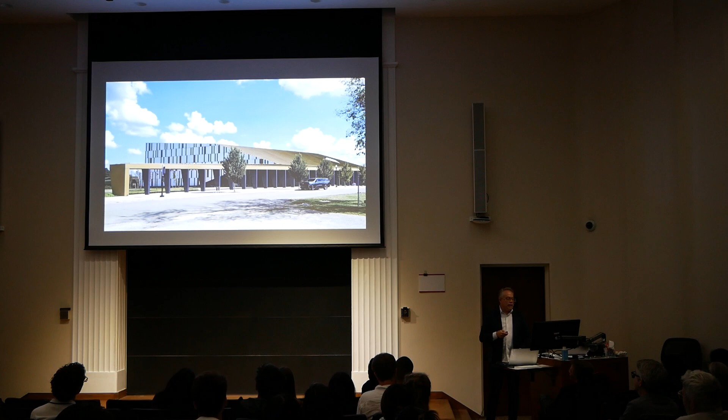Rather than put the building in the corner, we kind of slid it down. We have a public plaza there, with a lot of bikers and skateboarders that use it. Then, not to be outdone by its other companion buildings, we're using 71 Gold Creek Camaro paint and cladding on this one, with the live window.

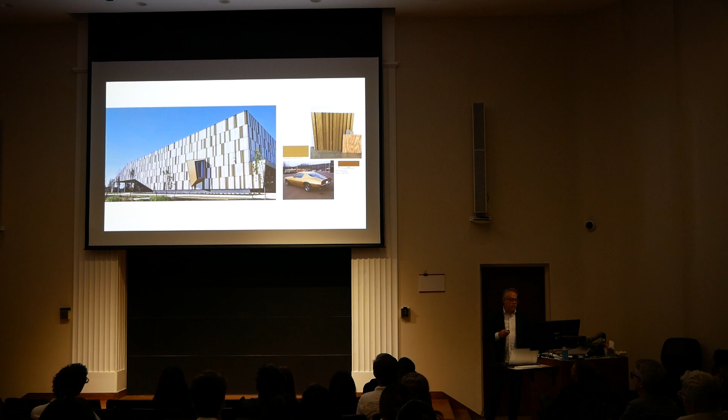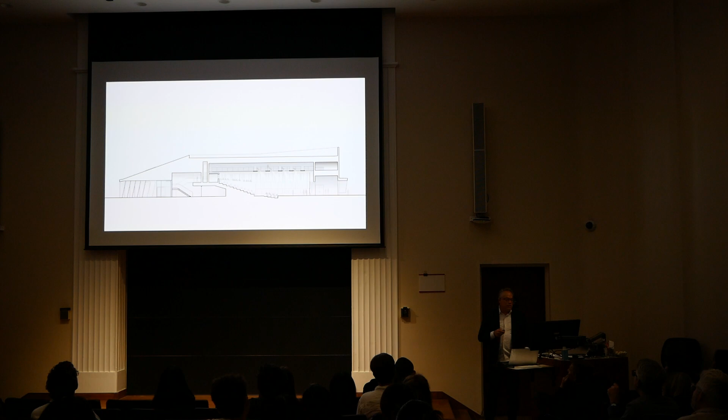There is no lobby, it's just a big porch, and that's where all the activity happens. It's shared by the community, so this is community and school, this is the interface.

Once you go inside, to the right is the intro, to the left are the music and drama practice rooms you see. To the right you slip in between these walls into the auditorium, all clad in local red oak plywood, with one big window developed with this beautiful hand-trowel plaster.

This connection to nature is still a classroom. It creates this beautiful soft figure amongst all these hard, crisp planes, making a nice backdrop for all the activities that are happening.

The last building on the campus of this ensemble is the big bike barn. Biking's a big deal, and they wanted a place to play some basketball and do some things. The headmaster wanted it as a real barn because they're called the barnstormers.

We stayed true to the barnstormer idea, pilots and barns. They wanted it built in such a way that it would self-ventilate itself, just like an old barn.

So this is our version of the Ozark barn, which I've been working on for 30 years. It was just one of those times when a commission fell in your lap that was something you were already interested in.

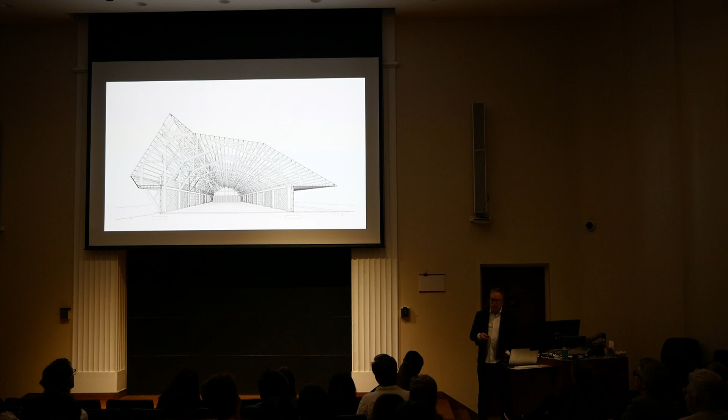A lot of local truss manufacturers kind of gang-nailed a bunch of 2x's together with some push plates. That's how we made it easier. But hey, it's all good.

Then just again, the fidelity of the craft - just getting these guys to line things up, getting the lights lined up and the joints lined up.

Big victory. Then our lighting designer came up with a nice idea that as the sun begins to set, it's opaque during the day, but as the sun begins to set it starts to become somewhat translucent, so when it drops over the horizon it becomes transparent and acts as a type of beacon for the campus and a great lantern.